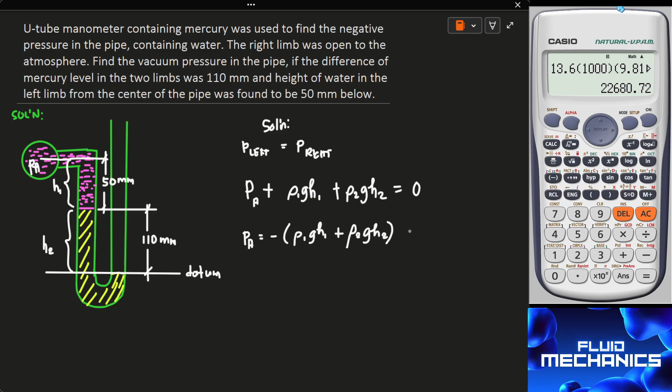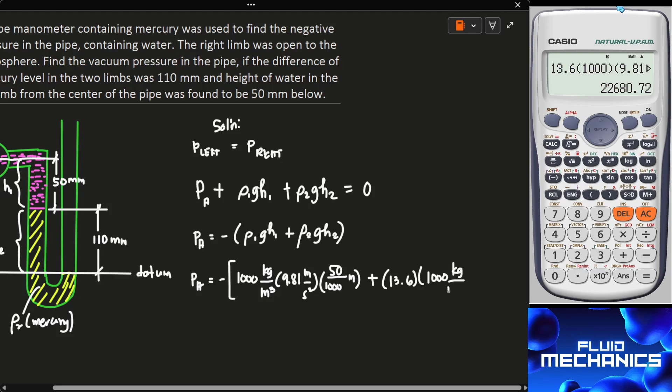So, PA is equal to negative. Rho 1 natin is 1,000 kilogram per meter cube since that is water, times g na 9.81 meter per second squared times h1. H1 natin is 50 mm, we will divide it by 1,000 to make it meter. Plus rho 2. Ang rho 2 natin is mercury. Specific gravity ng mercury is 13.6 times density ng water na 1,000 kilogram per meter cube.

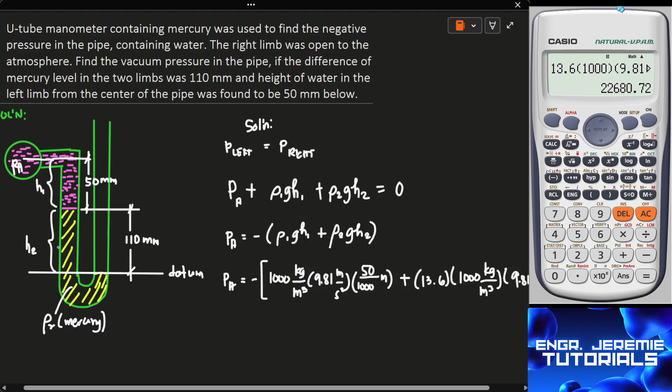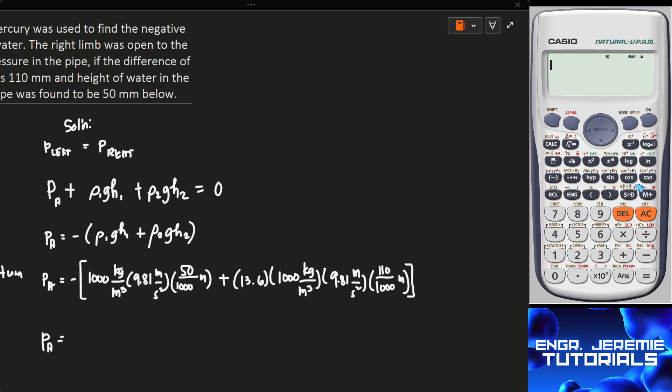Times 9.81 meter per second squared times yung height. Yung height h2 natin is 110 mm as stated in the problem. So 110, I will divide it by 1,000 to make it meter. Then pwede na lang natin yan gamitan ng calculator. Hindi muna natin isama yung negative kasi alam naman natin na yung sagot nito is negative.

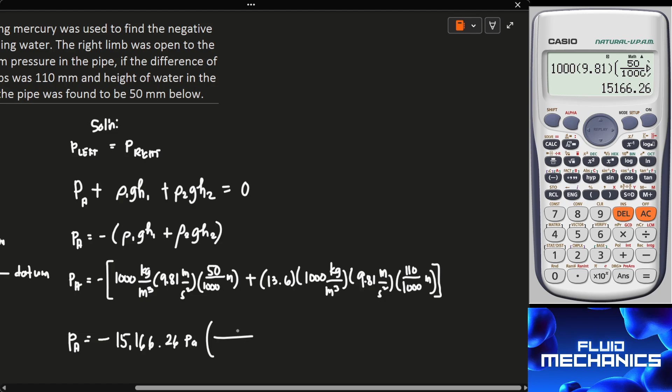So, 1,000 times 9.81 times 50 over 1,000, plus 13.6 times 1,000 times 9.81 times 110 over 1,000. Pressing equal, that is 15,166.26 Pascal. Convert, 1 kilopascal is 1,000 Pascal. So, the vacuum pressure at A is negative 15.16 kPa. So, yan yung solution natin for this kind of problem.